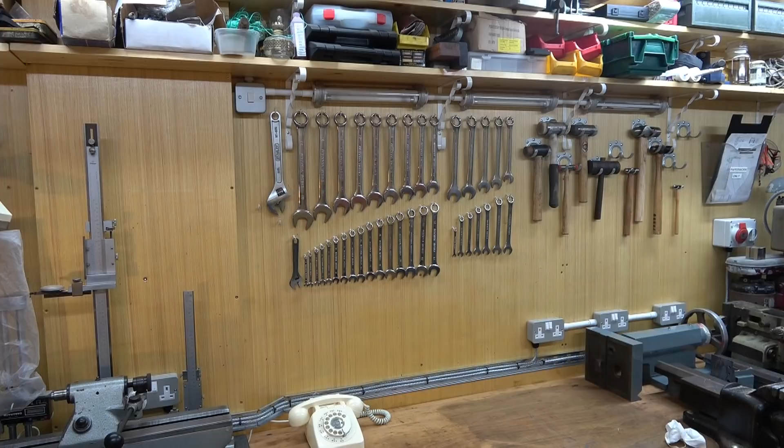Mr. Crispin Enterprises, you're through to the talking department. Yes. Yes. Very well.

Mr. Crispin here once again, and welcome to my workshop. Now, you could be forgiven for thinking this has become somewhat of a talking channel of late. Well, don't worry, it hasn't. It just so happens that all my talking videos have come out one after another.

Now, today I'm off to York. I'm going back to an old club of mine, and I'm going to be delivering a little presentation for them on what I've been up to over the last 2 years. And seeing as I'm going, I decided to take the camera with me. Now, this video is for the hardened audience member only. Not only is it quite long, but I'm also going to be covering topics that I've already covered in the past, albeit this time with the additional benefit of some live audience interaction. So if you are interested, then watch the video. I'm going to drive to York now, and where's my laser pointer?

Okay, well, thank you all for coming. I'm Crispin Cousins. I've been a member here for 11 years now, and Richard's invited me back to do another talk for you. So nice to see you all here. Thanks for coming. I'm in competition this evening with Strictly, COVID and the petrol shortage, but hopefully you all found somewhere to park your bicycle.

Now I'm here, Richard's named a talk for me, More Tales from a Workshop, and I'm basically just going to talk about the things that I've done over the last couple of years since I was last here. Some of you may be aware that I make engineering films for YouTube, and so when Richard asked me to do the talk, I had a bit of a think about what to present, because I didn't want to just re-present everything I've already put onto YouTube. So I'm hoping that the live audience will give us the opportunity to discuss a few things as we go along and have a few insights.

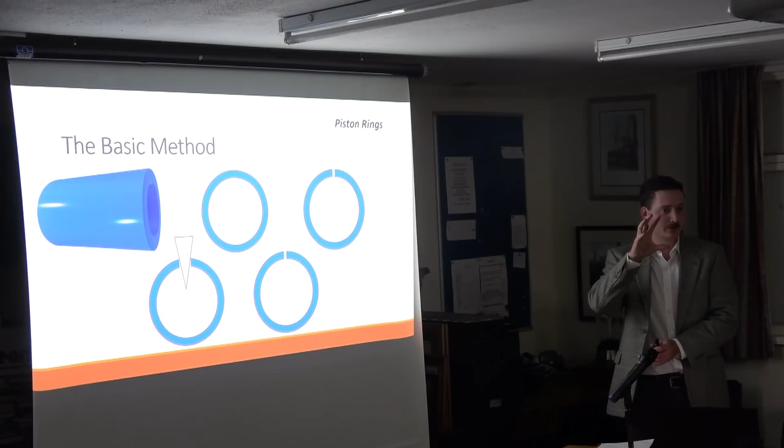Doing a bit of research, I found there's a quite well documented, very basic method that a few people here I know have used, and when you look it up on the internet, this is how it appears. You start with a tube, you part the rings off to form a basic ring, you then break the ring, either by forcing it over a taper, or some people just put it in a vise and hit it sideways, or expand it outwards on the back of a 3-jaw chuck. Normally it just breaks in one spot.

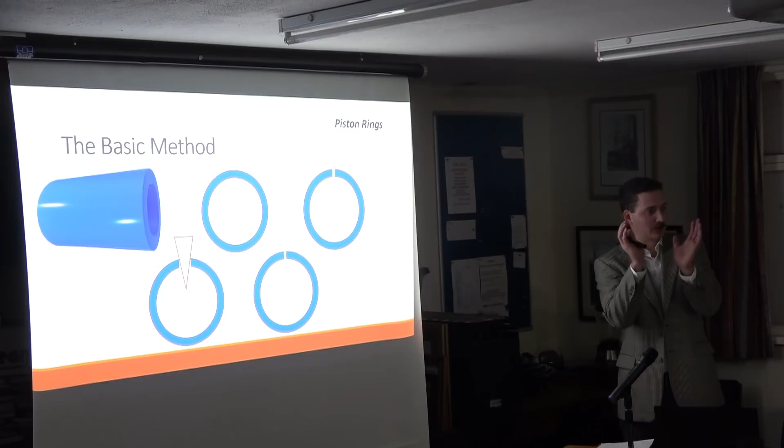So that was the basic method, up to the splitting, and from there the use of some kind of wedge or packing piece, because the process is to over expand it, anneal it so it holds that form, and then when it returns to the bore diameter it's under some tension. So: form a tube, part them off, split them using a fine slitting saw or hacksaw blade if necessary, put a wedge or gap in, anneal them, and then when it gets down to the bore size, because it's been annealed at a larger size, it's trying to expand open. That's the basic method as I found it.

I took it away and thought about it a bit, and what I'm going to do is show you the process I came up with, and then at the end we'll have a little discussion about what the differences could be, and any thoughts will be interesting.

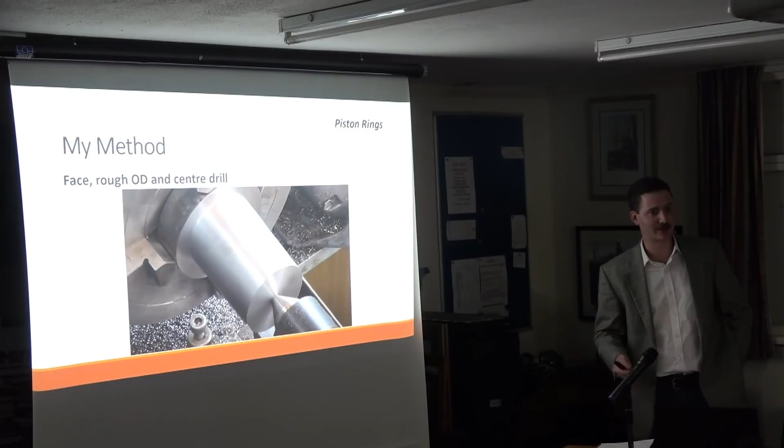So I started off fairly in line with that method. I just turned the right diameter down, or a slightly oversized diameter at this stage. That's fine grain cast iron, by the way. Anyone who's asked Richard about this will know he suggests fine grain cast iron or meehanite rather than sash window weights or a lower grade cast iron.

From there I then started to proceed differently to the method I'd shown. The problem with boring a tube out and then parting them off is that first of all you waste all the material down the inside, but also as you part them off you're leaving yourself a parted edge on the back, so you can't finish them particularly nicely in the first op. So whether you do a secondary op or whether you just accept the parted off surface.

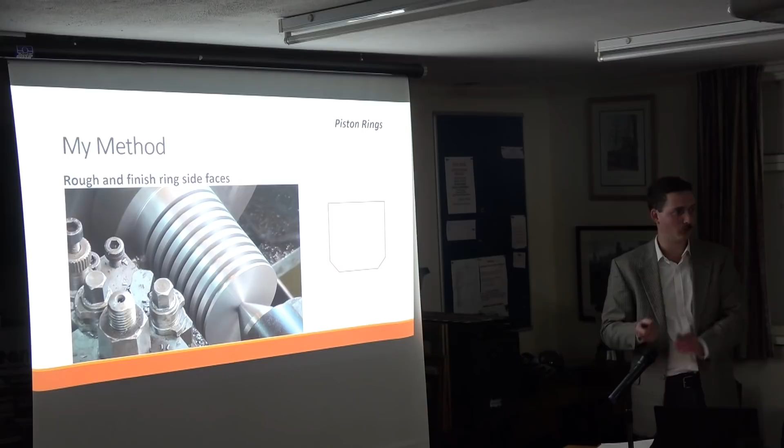What I did was come in with a grooving tool onto that diameter, and I worked my way along, roughing out the gaps and then finishing the side walls with a grooving tool, so that all the rings on this side and this side are fully formed in the first op. So I finished the OD and finished all the sides in this op.

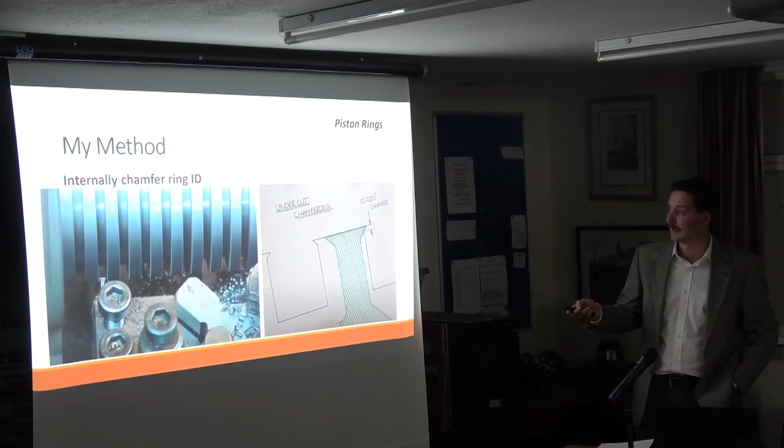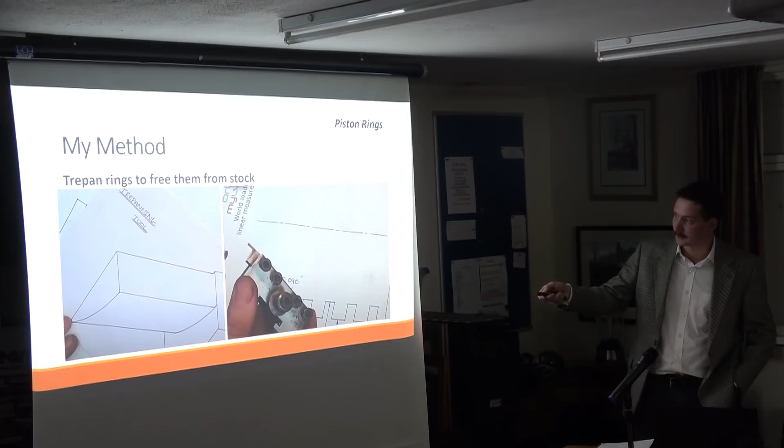Going back to this, I've basically produced something of this cross-section in 8 locations down the length, and from then I was able to free them from the stock material by trepanning. I ground a trepanning tool with a slight offset angle here compared to the tool body, so that this was all in clearance as it went down the diameter.

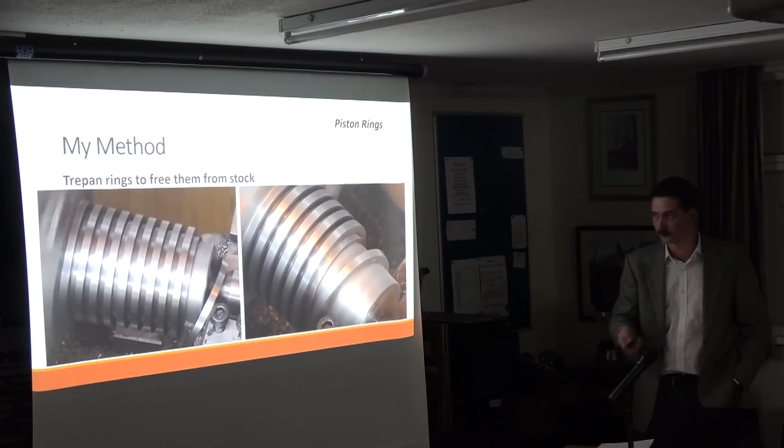That allowed me to feed along, and the rings came off. So you just feed through with the trepanning tool and the ring falls off, stop the machine, remove the ring, and then go on to the next one. The rings came off fully formed in one sequence, and I had this diameter left for future use. So that was fine.

That's just how I machined them. But the thing, as I'm going to explain with the piston rings, is machining a ring isn't really the difficult bit. So I decided to go for the splitting method rather than cutting them.

The only point of interest I can really find on the difference is that splitting gives you, in theory, the potential for a narrower gap, because your average cutting device is probably going to be at least 10 if not 15 thou. Some people ground hacksaw blades down to the minimum they thought could get away with, and then cut them with that thinned hacksaw blade.

I think the one downside of splitting them is that the fracture is not particularly neat. If you look at it under a loupe or optic visor, you can see the fracture isn't always particularly clean, and on 2 of the 8 rings there was a further hairline crack developing. So it might look like it's split, but it split at a funny angle and then came back, and where it was going there's another crack. So potentially, would that bit drop off one day?

How did you split them then? Well, I'll show you. I split them by starting with the ring, holding them on a block of wood clamped in the vise, and with a triangular needle file I put a notch on to encourage the crack to start somewhere, and they all did crack on the notch.

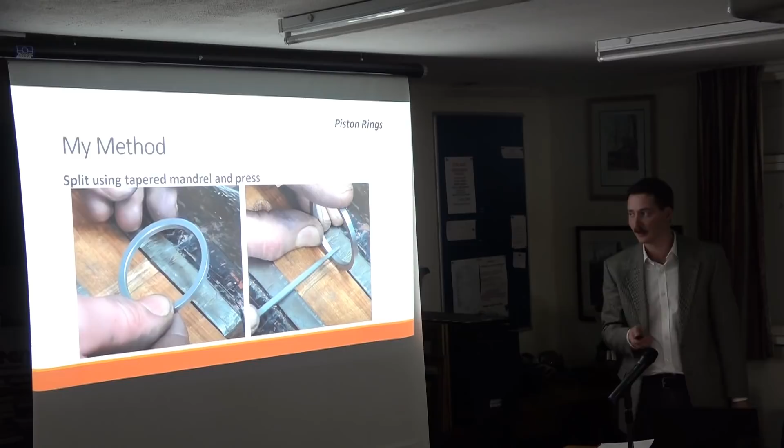There is an argument for just letting them split naturally, because in theory it splits at its weakest point. But I put a notch on to try and have some control over it, and I made some little tools. I made an internal collar with a shoulder on it, on the outside diameter, that is split. So the notch on the piston ring is then aligned with the split in the collar, and the internal bore of this collar has about a 4-degree taper.

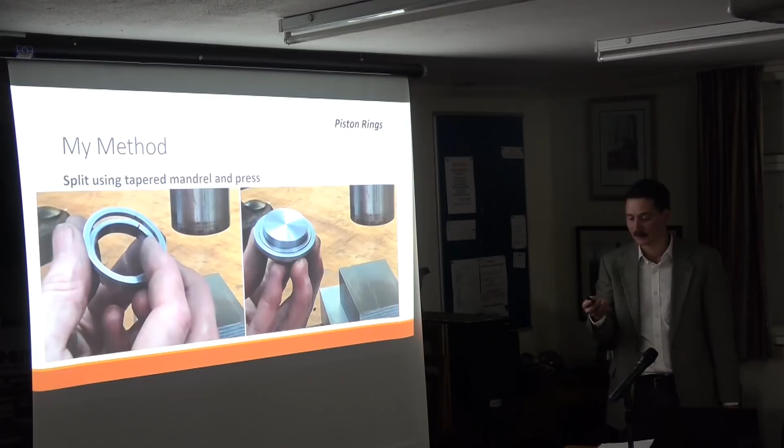Into that 4-degree taper goes a matching plug, so it's two tapers together, and as the male taper is driven in, this opens out and the diameter of the OD expands. Then under a press, which you can see the end of here, that naturally causes the ring to split. So that gave a method of splitting that was quite controlled and quite uniform, encouraging the whole diameter to go out evenly, as opposed to the 3-jaw chuck method where it's sort of being turned into a triangle.

Driving the ring down a Morse taper seems effective. Depending on the size of the piston ring, you may need to find a number 5 Morse taper or something. The problem is how you would keep that ring square and actually push it - you'd probably need to make some kind of tube.

I don't know if you can see from the distance you're at, but you can see the fracture. Although it's a clean break, it's not particularly neat. And as I said, on 2 of these rings, you could see where the fracture had almost started to return. So I made extras for future eventuality, so I didn't end up having to use those 2, but it's worth noting that if you were cutting with a slitting saw, you wouldn't be subject to such things.

I then stretched it onto a mandrel, and at first I just put a wedge in there, and I noticed that the ring's circularity was totally lost. As soon as you put a wedge in there and expanded it, it basically pivoted out like a pair of calipers and was no longer circular. So I thought, what I'll do is make a circular mandrel and encourage the ring onto a circular mandrel, and that kept it circular.

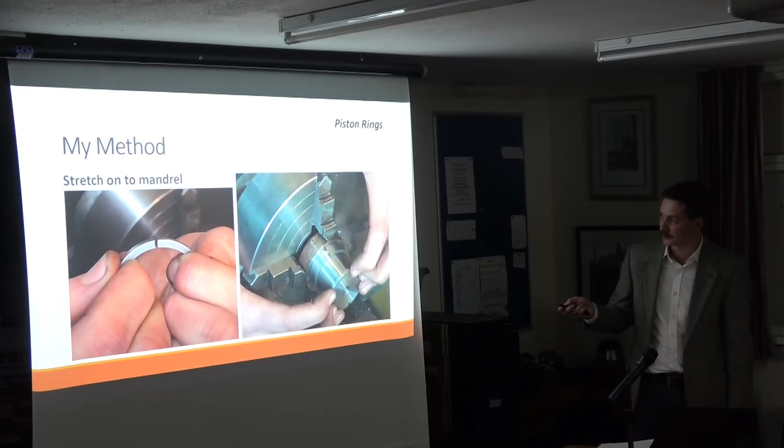So I stretched it out onto the circular mandrel, stacked all of them up - you can see the gaps there - and then I bolted a cap on, and that was the arrangement for annealing them. I heat treated them just with a propane blow lamp to a dull red, and then let them cool slowly, and that was as technical as the annealing got, and that gave me a finished ring.

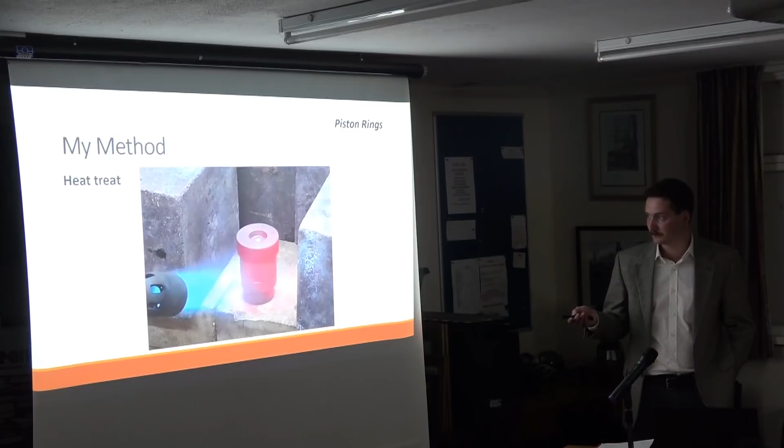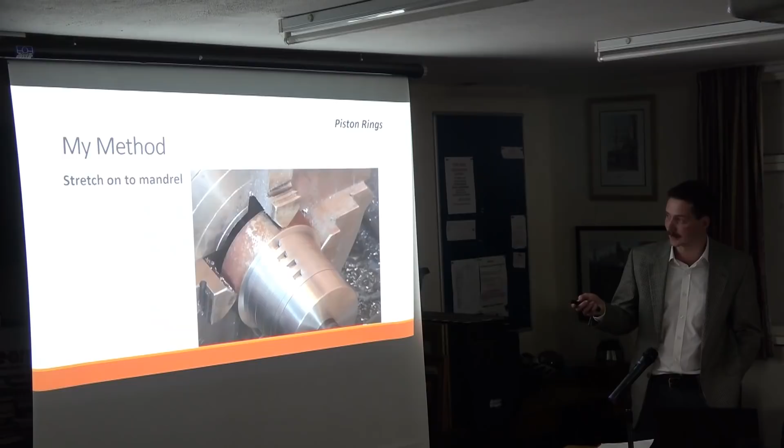So you can see there, that was the cross section. I was working to 1/8 of an inch by 1/8 of an inch on the cast iron, and after the annealing you can see that gap has shrunk down a bit. So there it's about 3/16 of an inch, and it's come back down to about 1/8 of an inch.

So, any thoughts? I'll let you open, Richard. Well, the ring isn't circular. I drove them up a Morse taper with a collar, and I got a rough split, which I thought would come back together perfectly in the bore. This is on the Wren, and the Wren has had those piston rings in for 40 years, and they're still not fully bedded after 40 years. They're still out of circle.

So what you're saying is right, they are not a circle. But bloody hell, it doesn't really matter. The thing has run spectacularly for 40 years, so it's good enough for me. But I know you're a perfectionist, and I know you want it right.

Any other thoughts? So those of you who've made piston rings before, how did the method compare? It matters for internal combustion, whether round or not. Of course it does. I think these steam locomotives would run whether or not the piston ring is round. I think the question I'm getting at is how do you produce a round piston ring? I've tried all the ways and haven't produced a consistent batch of round ones. What methods have you tried?

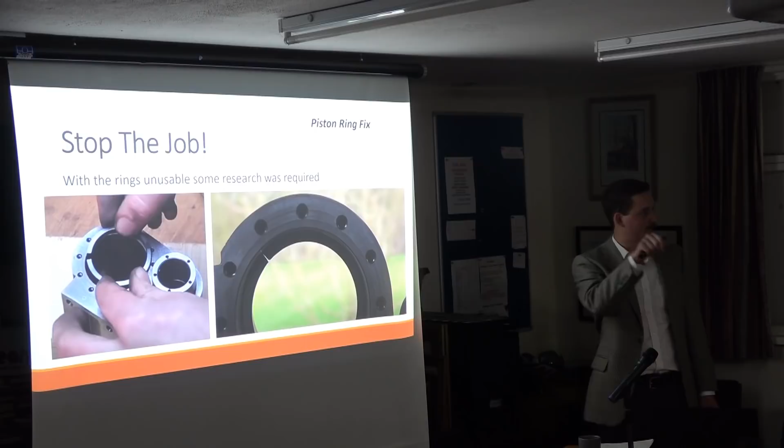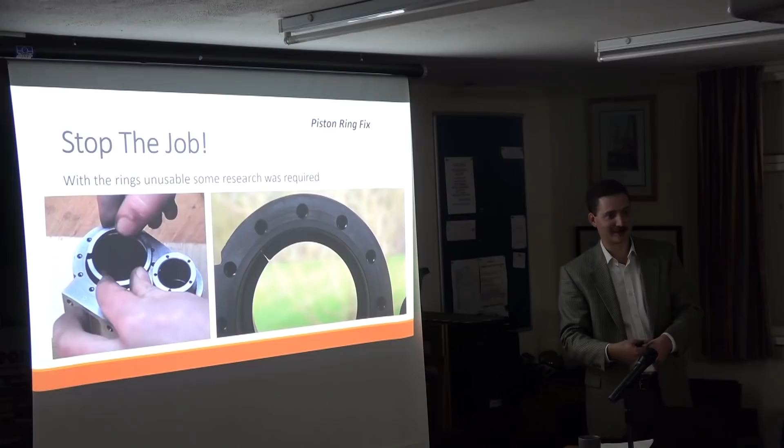So I had to do some research, and the two names that appear in the topic of piston ring research and model engineers is Professor Chaddock, who was a writer for Model Engineer, and George Trimble, who worked for NASA, and he produced a 16-page document. He was an internal combustion engine builder.

And Mike Sayers, the Bentley engine man, he sent me an article by Trimble that he had done over the course of building his engine. Trimble had spent a lot of effort trying to get his piston rings right for his internal combustion engines, and produced a 16-page document on his method showing the fixturing, all the science behind the curves and how it all works.

So to just recap then - okay, I did the rings differently to making a tube, but that doesn't really matter, that's just how you form the ring. So the ring, there's no problem with the ring other than its dimensions, but when it came to splitting them and the further processes, this is where I think the problems crept in.

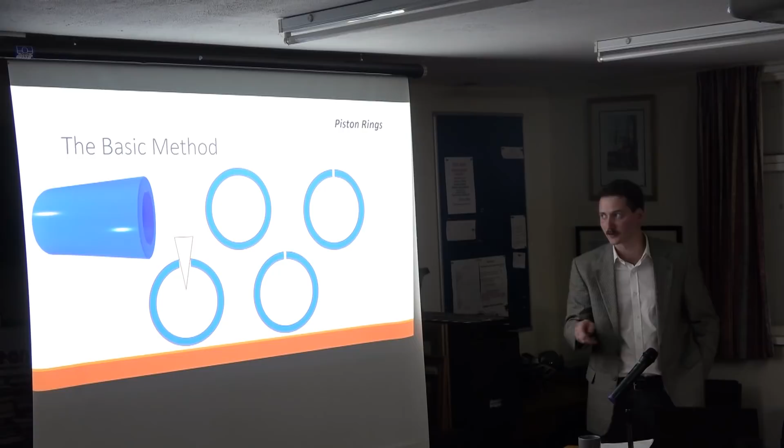Trimble doesn't recommend breaking them because he's got a detailed article from a sort of material scientist point of view, but he thought breaking them induced stresses that they would never recover from fully, whereas if you just cut them, then you'd not put the rings through that stressing.

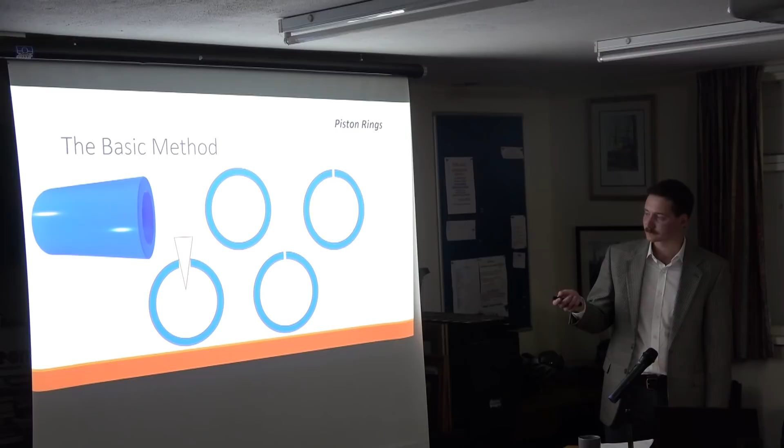The main difference here, as I'm going to show you, is in the wedge. So I stretched them onto a circular mandrel to try and keep them round, but all the science actually says you have to use a wedge and let them go out of round, so that when they stretch back in, the forces are equal. And when it's sort of written out, it is quite obvious.

If you bend it out, so it does a hinge sort of manoeuvre, and then you set it there, it's out of round. When you reverse the motion, it pivots back in around the same point and reforms a circle. When you make it stay round, then when you come to put it back in the bore, it pivots back in. So I actually just caused the opposite of what I thought I was fixing.

So that was the cause for the kind of roundness error. When you mentioned that you hadn't managed to get a round one, what kind of size errors are you talking about? Is it just a visual inspection, or? Yeah, when you put it in, you see the light through it.

So you've not got a number on it, 1 thou, half a thou? Less than 1 thou, I would say, yeah. Okay. So I think that the error for why it was so far out was entirely down to this. I thought I was improving the process, keeping it round, but because you've then set it round, when it bends back in, you've lost the roundness.

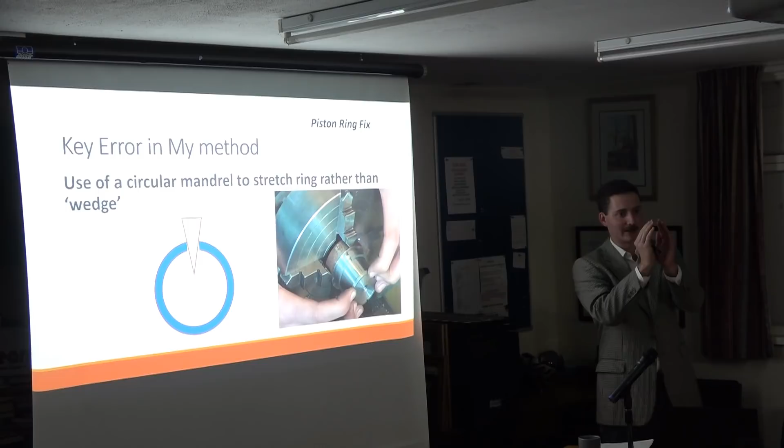So a wedge or packer is sort of the way to go. Trimble uses a dowel so that he can actually calculate how far the contact points are. He has a dowel on a fixture that fits in, because obviously once you've cut a straight slit and you open it, you've then got a taper. Yes, so he uses a dowel to maintain the proper tangent points. But that was the main thing.

There were 2 other things. I've already mentioned the gap, so I couldn't get these to go in the bore because of that gap. So clearly that was an error in the method, but also the cross-section dimensions. And I've done a lot of thinking about this because the drawings clearly show a 1/8 by 1/8 slot in the piston. So when you look at the piston, the piston ring groove is 1/8 of an inch wide and 1/8 of an inch deep, and there's no detailing of any piston rings in the drawing.

And what I actually think is, of course, it's not been designed for piston rings. It's been designed for soft packing. It's Martin Evans, yeah.

So I've made it, not being able to find - because all we've got, it's not hugely well documented, the designs - and so I've had to, quite often with the drawings for this locomotive, find the missing pieces, and I thought I was finding a missing piece.

I actually think it just wasn't designed for that, but I had double checked before I made these, and gone on the internet and done a search, and lo and behold, the Model Engineer website - someone's talking about making 1/8 by 1/8 piston rings for their Sweet Pea, a similar size locomotive, so I thought, there we are. After I couldn't get these back on, I went to double check the article, and it turned out he was actually asking why he couldn't get the piston rings on his. So more careful reading required next time.

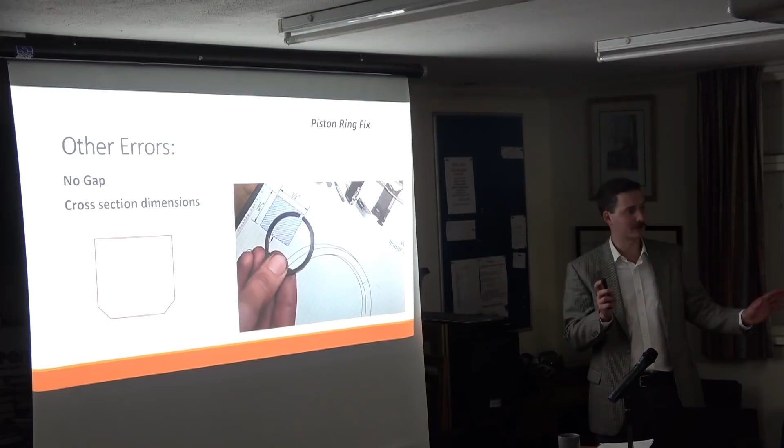Anyway, the quest was to make a piston ring, and I read this document by George Trimble that Mike Sayers sent me. He's in no doubt that he's found the way to make them, and it's a very well written document. I basically used that and some comments I got on YouTube for how to fix it. Trimble's method is entirely a one-stage process - you turn the ring, you expand it, and that's it. What I decided to do was go more down the Professor Chaddock route, where he actually remachines the OD, a bit like you were discussing earlier, and I'll show you what happens.

According to Trimble, you calculate the correct piston ring width, the radial section, by taking the bore diameter and dividing it by about 27. He said somewhere between 25 and 30, so I just divided by 27.5, and that gave me a ring radial thickness of 1/16, pretty much dead on, as opposed to 1/8.

Because the gap was also too tight, I had all the components there to fix the problems. So what I did was allow the gap to open up, to take the bore bigger, and that gave me metal on both the outside and inside to remachine. So here's the original 1/8 radial thickness, and by opening the gap up, you've then got material both sides to machine what you need.

So I rebored the middle, got a piece of aluminium and made this rework fixture. The bore of this aluminium is 4 thou bigger than the cylinder bore, which took the ring out to about the right gap. This step here is pretty much the same height as the ring, so four flange screws just pinch it in place. It naturally expanded out into the diameter, and then it's pinched backwards by the screws. Then I came in with a boring bar and thinned it down until this was 4 thou over a 16th wide.

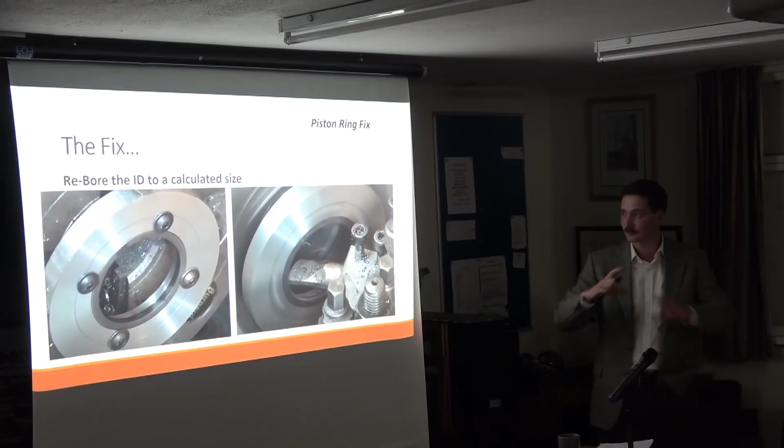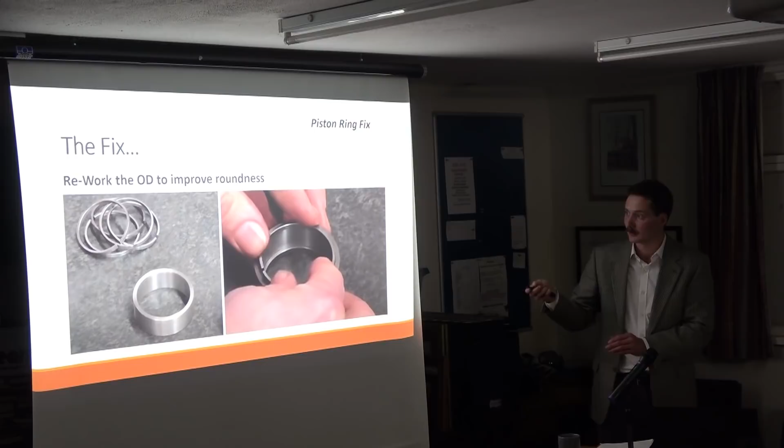So what I'm doing here is taking the bore to the new determined ID, and the OD is slightly oversized because it's in a bigger diameter than the cylinder bore. Once I corrected the ID, I made a sleeve 4 thou bigger than the locomotive bore, and then three at a time I put them into the sleeve, clamped that sleeve back in on this mandrel with a cap, got it running true, and then pulled the sleeve off. So I've now clamped the rings at a position where there's 4 thou left on the diameter.

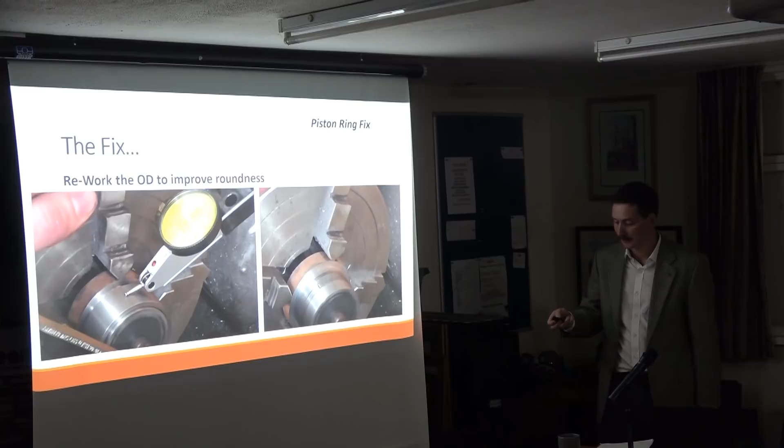Yeah, and then I just very carefully machine them down. You can see here, I blacked them up before I started, and you can see the out of roundness on my first cut. Then I took the 4 thou off, so 2 thou radially, which was hopefully just enough to clean it up, and that's the cleaned up rings then.

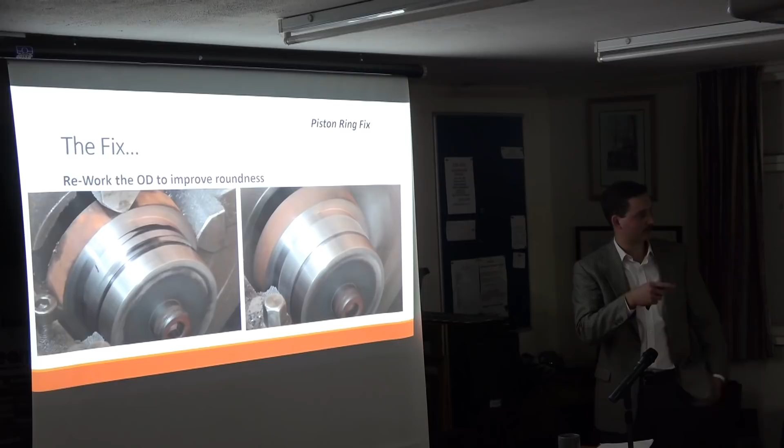Well done. Is that process clear? Yes, brilliant. And that, to my inspection, completed the task.

So the gap ended up about 10 thou, which is a lot bigger than what people on the forums were saying, where they wanted no gap. But if you look at anything in internal combustion—I know the temperatures are slightly different—but by and large everyone's recommending a gap rather than aiming for no gap. So I ended up with a gap, and although the angle was slightly different, I couldn't see any daylight.

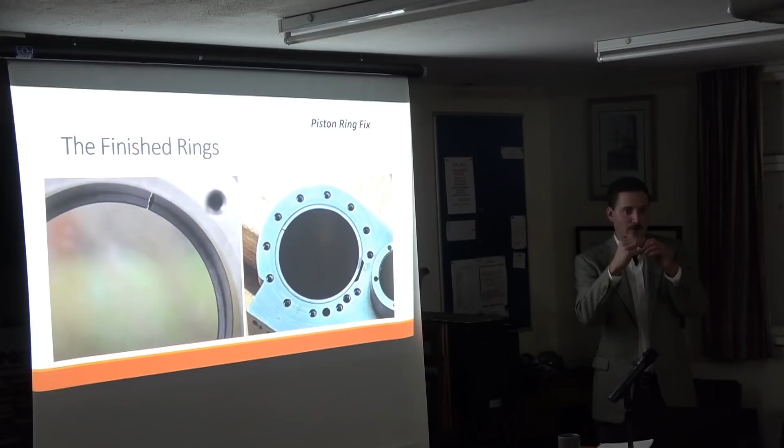Well done. So for those few piston rings at least, it did work, but that's a horribly involved method. If I was going to try again, I'd either stick to Trimble's method exactly, using all his calculations and fixture drawings to mimic it precisely, or I'd just make them oversized to begin with and machine them down after annealing. There's an argument that if you're going to machine them down after annealing anyway, why bother annealing them first? Just make them too big, mill a slot that's too wide down it, squeeze them in a tube, remachine them, and cut out the annealing altogether.

Can I just add, when we see a gap like that, as engineers we think 'that's an enormous gap,' but it's not, because the piston is either side of it. In this bore, the piston is 1.5 thou smaller than the bore diameter, so also when that ring heats up, it's just going to close. The gap will come together anyway. Once you've got the piston in there, only 3/4 thou of that will actually be visible.

So, well done—I've given my answer, but if anyone's got thoughts on how a piston ring should be made, feel free to share them. I think they continue to be tricky, is all I can say. But Mike Sayers says he follows this method for his Bentleys exactly, and he's perfectly satisfied with the results, and he's got high standards. So has anyone here come across the George Trimble method? No, no.

Unfortunately, it's copyrighted in America, the full 16-page thing, but there's a 3-page condensement of it available for Model Engineer, and I could probably find those article numbers if anyone wants them for the newsletter. Very interesting. Yeah, but that's my tale with piston rings.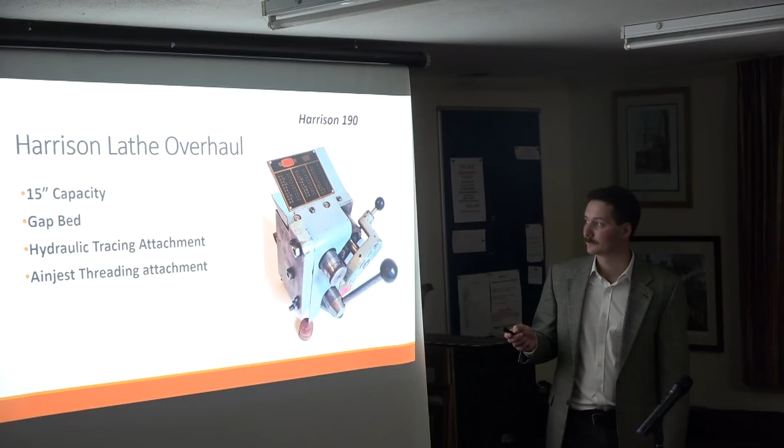So why not overhaul a lathe? Now I'm going to put Richard on the spot here. When I first started in model engineering, you said the number one thing not to do is buy a lathe and take it to bits. Yep, yeah. Would you want to expand on that?

Well, the thing is to use it as it is, but buy a good one and use it, which is what you did with your ML7. But so many people, and a lot of people in this club, buy a machine, take it to bits, come to an insuperable problem, and never get over it. There are several members in this club who've done that. I'm sorry, but taking things to bits is not a good idea.

So the argument is that if you've got a machine tool and you're trying to build a locomotive, you should get on and build a locomotive. Dead right. Because what happens is you think, oh yeah, I'm going to take it apart this week and put it back together next week, and next week never comes. What happens is what I'm about to show you.

Oh, go on, show us. You take it to bits. So I've given it a clean over, which you think, oh yeah, I'll clean it in a few hours, but by the time you start scrubbing, it takes a month. And then you find to clean this bit, you've got to mess around.

So you take it to bits, and then you leave all the bits on the bench for 6 months because you spread it all out, and suddenly it's not a lathe you've got to clean, it's an entire lot of bits, scraping it all off with razor blades, then trying to degrease it, and there's an awful lot of bits, and the number of surfaces just goes on and on.

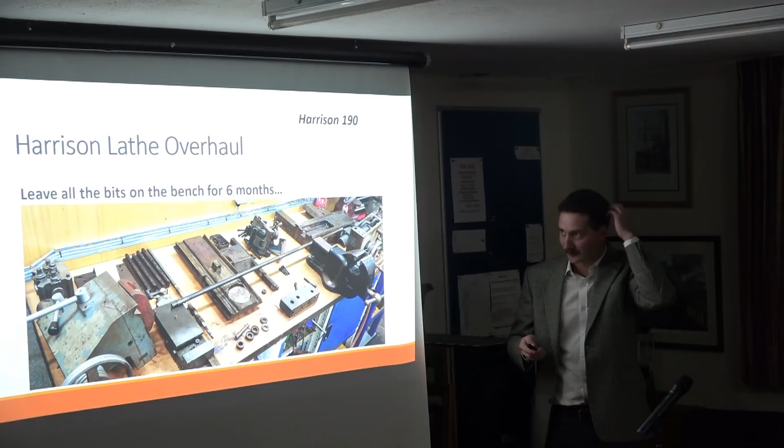And then you find, oh yeah, I better take the grease nipples and bearings out, so that goes on and on. And once you've got it to this stage, you think, well, I'm never going to have the lathe in this many bits again, so I better paint it while it's apart. And then you think, oh yeah, I don't need to be too neat, I'll just paint it and get it back together next week. But it goes on and on.

And eventually I got round to painting it, and I'll be honest and say that the moment I got to painting this was a good 8 months after I took it to bits. Because...

...I've got this Myford ML7, so I've been able to carry on doing the model engineering and just do this if I didn't feel like doing any machining. So, compared to actually machining, it's not very technical, just cleaning bits, as long as you can remember how they went back together. So I ended up just scrubbing the whole thing down with endless Scotch-Brite, paraffin, thinners.

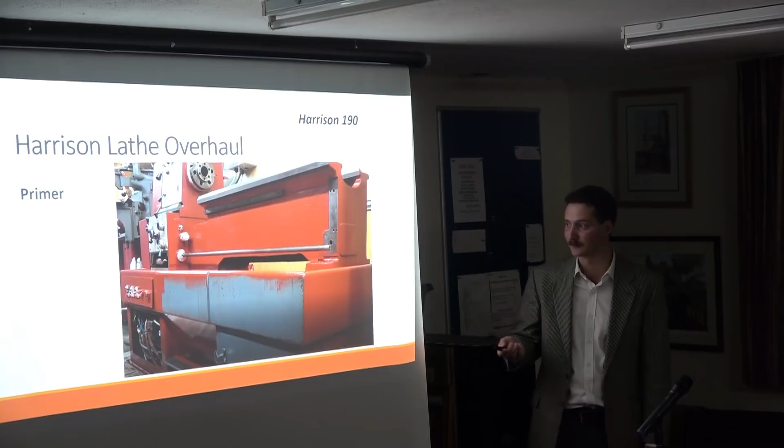Scrapers, razor blades. Got it to this stage, painted all the aluminium bits in etch primer, then gave the whole thing 2 coats of red oxide, then some machine enamel.

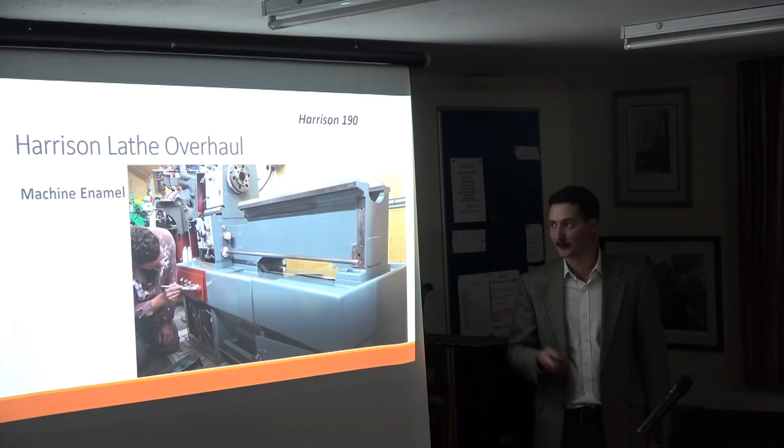Wow, so it's ready to go back together now. Well done. So my only justification is the condition it was in. If we go all the way back, I didn't want to use it in that condition because I just thought it might do it some harm.

So the original intention was just to take the cross slide and the saddle apart to make sure all the ways were clean. But then, to get the saddle off, you end up having to take the apron apart, and then the lead screws come out, and the tailstock comes off. I have avoided making the job too big, so I've left the headstock entirely assembled, I just changed the oil in that. There's nothing really to write home about in any of the gearboxes.

So that's it. Well, it looks lovely. Well done, going back together. All the bits on the bench, of course, you've got to paint them, and the swarf tray comes out in the guard, so it ends up being a lot of work. Lovely.

And I said it wasn't very technical. The painting and stripping and cleaning is not difficult. The challenge I had was powering it, because my workshop runs off a 3-phase rotary phase converter rather than an inverter. So rather than have an inverter on every machine, I've just got one rotary phase converter that supplies 3-phase power to the whole workshop.

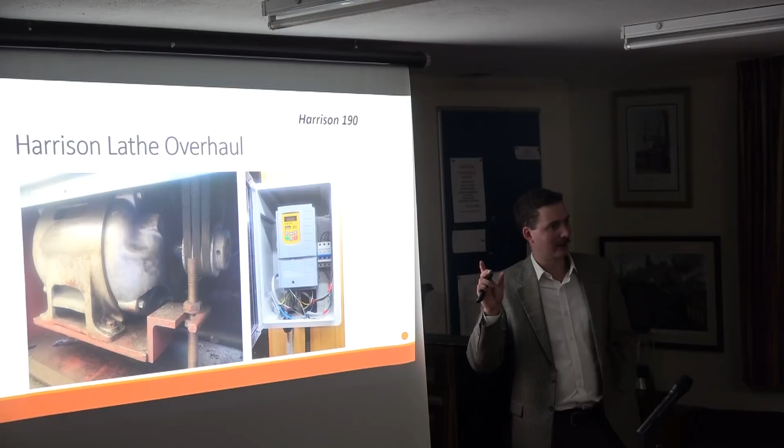So if you wire two in, will it try and start them together? I don't know anything about them, but I was told if it's a 2-speed motor, you're going to struggle running it off a phase converter. So what we did, a chap called Paul Compton, who helped me with this, altered the lathe wiring so that it runs directly to the high-speed setting on the motor. So the motor is always running in high speed, and if you want to slow it down, you just turn the inverter down, because the inverter is variable speed. So the slower motor speed is entirely taken out of the loop, it's just wired directly to the high speed. So that has enabled it to run.

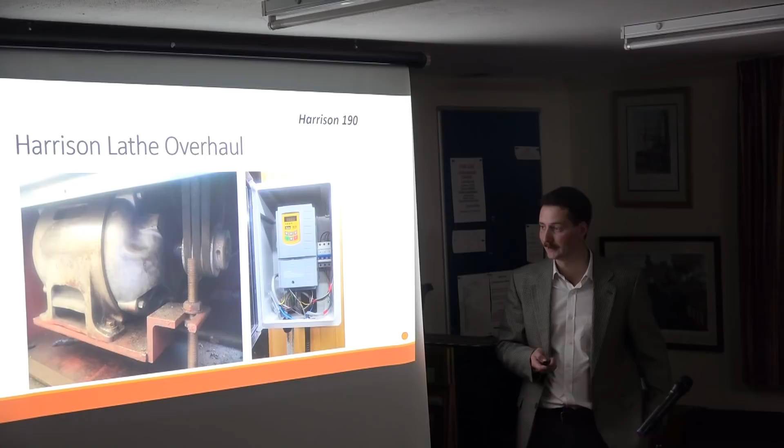It's got a soft start, so it doesn't dim the lights, and I think it'll give me enough speeds for general machining. Well done. So that's the lathe.

Now I said we'd finish on this question: why are you building that? I'm building a steam locomotive, and sometimes on YouTube, often in real life, people say, why are you building that? The question can be asked in two ways - why are you building that instead of doing something more interesting, or instead of this, or just as a generally interested question.

I did a video presentation trying to answer this, assuming the person is asking because they're considering doing model engineering themselves. I thought the key one was motivation. For instance, why are you building a locomotive? For me it's purely a mechanical engineering thing - a great piece of engineering, a lot of moving parts, complicated parts, plus the additional task of a boiler. So from a pure mechanical engineering point of view, there's a lot to it.

I know other people build for nostalgia, or trying to make a perfect replica of something, or a one-off - they've found something they like and try to recreate it in model size. Then the decisions on what to build are more involved: are you a beginner, practical considerations like how you'll move it when finished, time scales - a lot of people probably don't realise the time scales involved if they take on a locomotive.